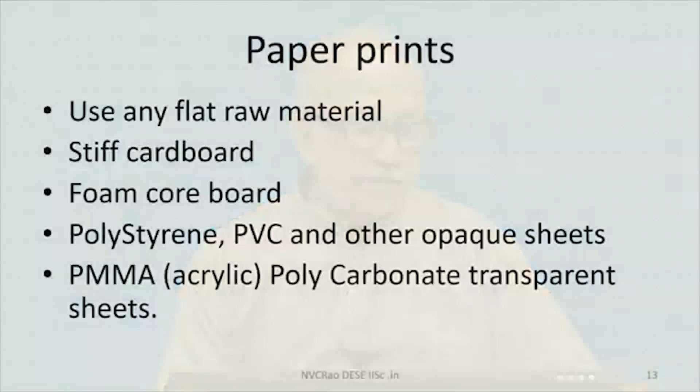Now, kindly look at my, what do you call this thing, saying it is very convenient for us to use any flat material because most of the things are made, and use the printouts as template. So, we have this template here. You can always stick it on the intended material, then you can carry out operations, then any work spot.

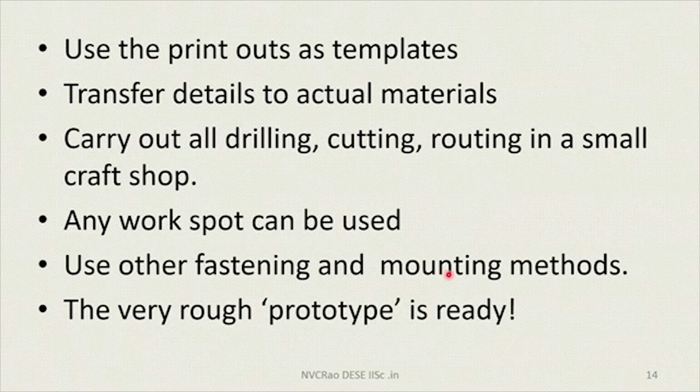Here it comes to mounting and fastening methods. Traditionally, in the case of molded parts, we have snap in place. Snap in place works well, but even there the first time simulating the snap fastener is a little tough. So, otherwise probably use a screw or something, or even putting a tape is no problem. Holding two parts together, just about anything goes and your prototype is ready.

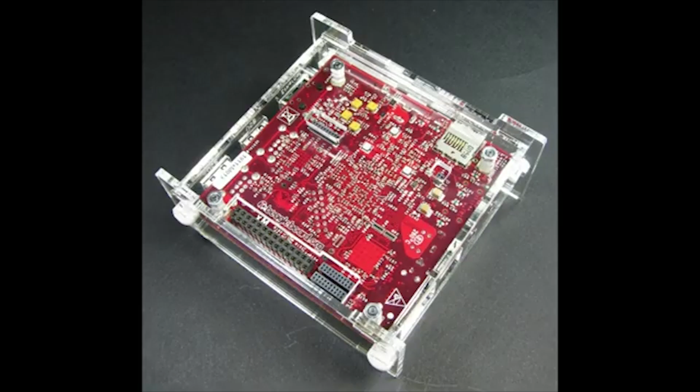Now, let me start with a few samples. This of course is taken from the available resources, and I acknowledge whoever has first made it and got this going. This one is a layout sheet prepared meant for probably laser trimming or laser cutting and assembling the whole thing together to make a beautiful system like this.

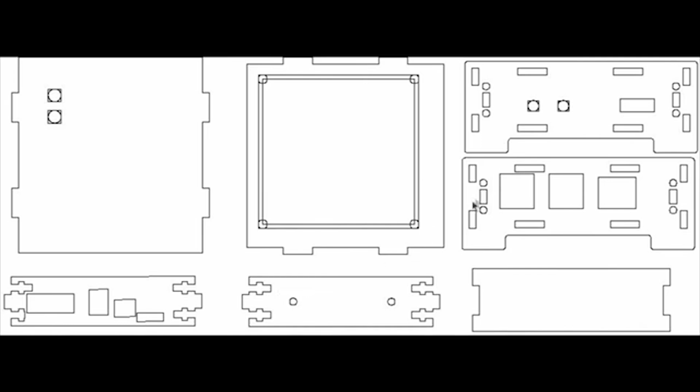Have you noticed this? This uses exactly all the parts that are described there, and in the corner have you noticed this? There is a special key like thing which is assembled here. This key probably sits here. You see here there are some places each will snap in place. Then you have seen these two things. These probably go and sit somewhere.

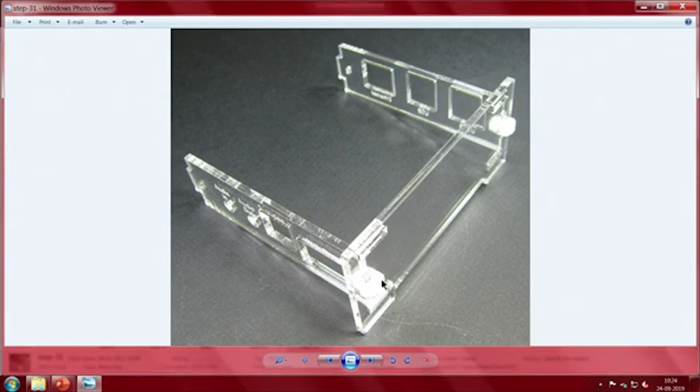So, you see here even production parts are made with flat sheets, and every time you need not go and depend upon a full fledged printed part. See the sequence. I have one part, and then after that, I will call it one face and two opposing faces, and then I just pointed out to you about the key or some fastener which is put here, and on the other side there is a bottom which is stuck on these things.

Why I am showing you this is probably this whole thing could have been made in a cardboard at home, because cutting a cardboard is easy. Now, you see here the moment you assemble everything, we already have a nice neat box, and then here this key has been shown. Maybe you can relate that you push it inside and everything sits here. Part of them are open, part of them are joined together. See how cute the whole thing looks.

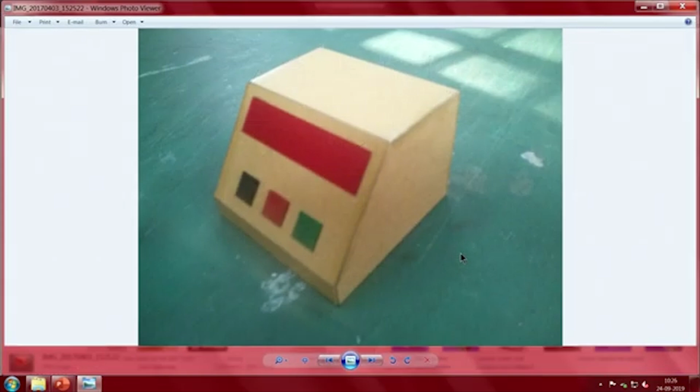Now, let me take the case of the reality of fabrication. If you imagine one small, I will take this. See here, this is just made as a student exercise. The idea being a cuboid structure, and there are the basic 6 faces. Right now ignore, of course there is a 7th face, ignore that. For you to understand typically the size, how you will hold it in the hand and so on, you have seen this.

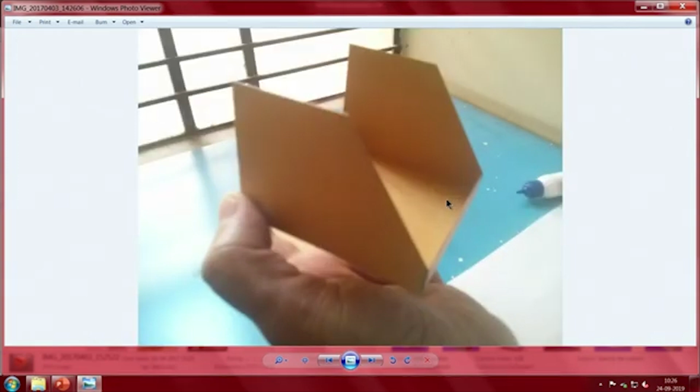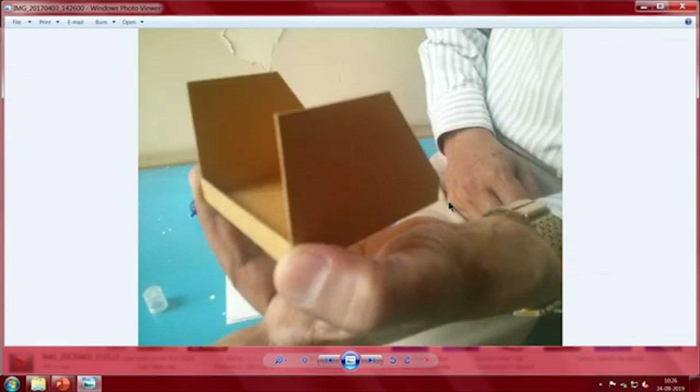That is my hand, and the whole thing is assembled by making things out of a simple cardboard. In this case it is a hobby cardboard, and two important details you will notice. In the front there is a small tab, and at the back one more tab is there. The function of the tab is that it will hold the structure together, and it can also be used as a fastening technique, putting one on top of the other.

This being a flat object, it is exactly how something made out of polystyrene, acrylic, PVC, or polycarbonate can probably be made as well. Now you see both of the parts are put together. Have you noticed some very interesting thing about it? First of all, just for simplicity's sake, thickness has been ignored. But in the case of sheet metal, we will need to consider the thickness.

And you see a gentle inward curve is given that will ensure that things fit. Now you see this is a developed sheet based on a development drawing that has been probably pasted on an A4 size sheet, and they have just trimmed it according to that.

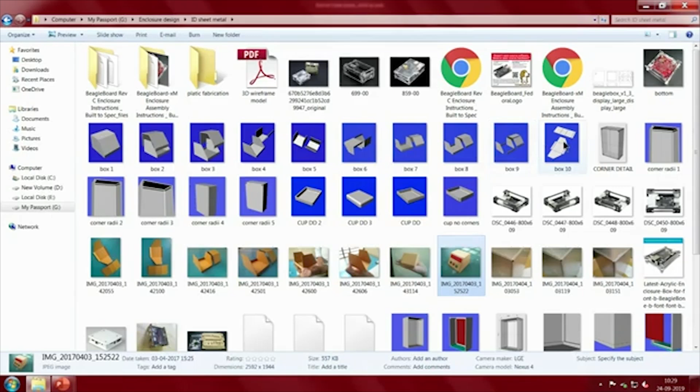Now, this is a slightly modified version of the other thing. If you are to use any other material other than the cardboard and which cannot be easily bent, a much easier way would be to probably make it into separate pieces. So here it is probably made out of an acrylic material, or in our case generally what we do, the top cover, this portion of it, will generally be made of acrylic so that somebody can see inside, and this whole thing will be made probably out of acrylic but opaque, so that it looks a little like a product, but then you can place this on top of it.

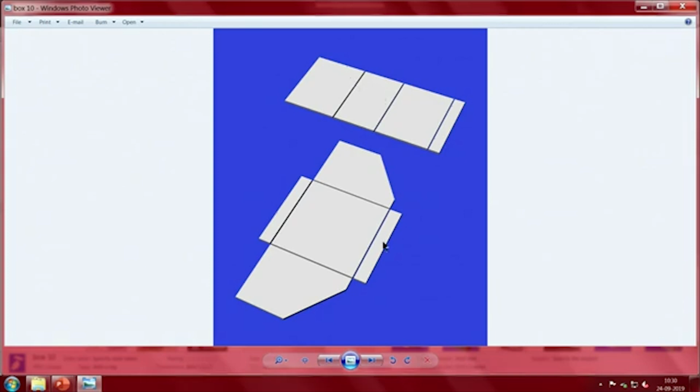Now we come to the interesting thing, what about the front panel which you are talking about. You see here all these pieces are small pieces. Now the first thing you will discover as part of your prototyping is that thicknesses are involved. Can you see here? There is a thickness, and now we need to take a decision: the height of this, does it go inside this and this portion covers it fully, or alternatively this is one portion and you have it as side two end caps. Depending on your design and various things you would like to have, you need to make a decision to subtract the necessary thicknesses.

Now we come into this corner, you have seen this here, this is cut normal, this is also cut normal to the surface. Does it match? Of course it does not, but you see here, the way this is shown, if I assume that this is a 45-degree angle, we have 90 plus 45, 135 degrees here, it does not match easily. So, at this point, a good craftsman, or you just need to match things and put up with it as things are.

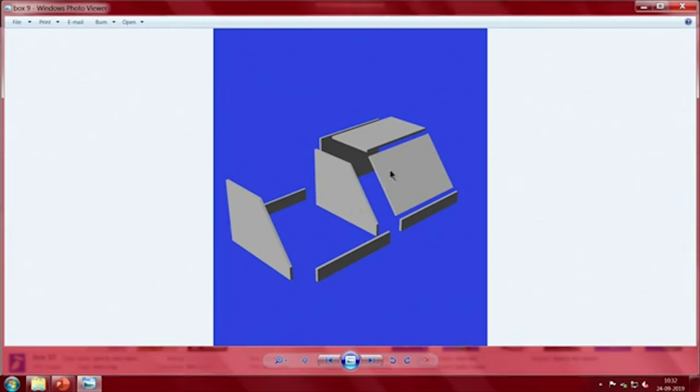Now, we come with a very clever alternative. Why need to match it at all? Why can't you let the top portion overhang a little? Let it overhang. Similarly, let this overhang a little, let this be recessed inside, and the moment you make this overhang by say 2 millimeters, you can have the side panels also jut out by about 2 millimeters. So, you have a bezel-like structure, three times a bezel-like structure, and you can probably hide all the imperfections. And part of the advantage is from the inside probably these two can be joined together using simple super glue or hot melt.

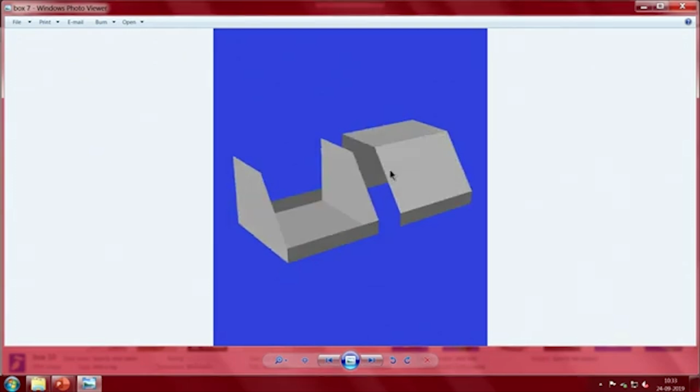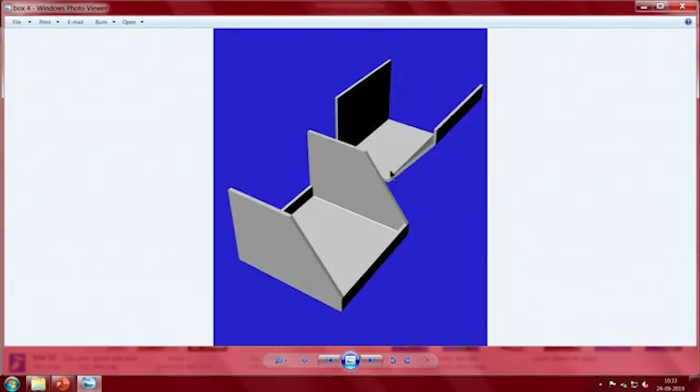See this, of course it looks miraculous, they have all been attached together, and now what was a thicknessless thing, suddenly there is a thickness. You need to just put these things together, and the other side of the view, see this, looks all hunky-dory, there is no issue at all, except the little hunky-doryness probably needs to be cured. You see this corner, this corner seems to be a problem.

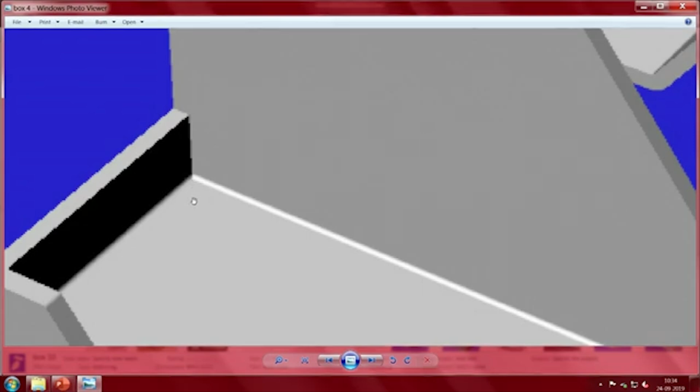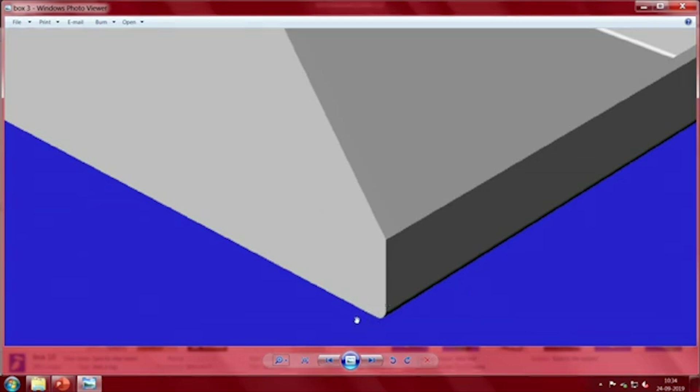In the original development, we have just assumed these things fit nicely, and then in this corner you will see a very, very interesting problem. This being a sheet metal exercise, you will see that there is always a radius here. Can you see? You have a radius. Now, how do you let the radius match with each other? We have chosen to ignore it, but actually there will be a gap here, and when it bends here, you need to give a corner relief for the whole thing.

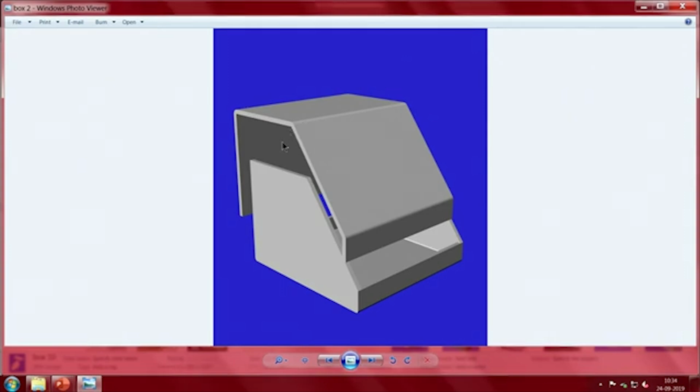So, we come to actual manufacturing practice, and this is what I was telling you here. You see this internal, and you see this internal, this appears sharp, but that has a radius. Something has to be done to address all those things. Eventually, when you put everything together, things should look neat. See here, neat, neat means neat.

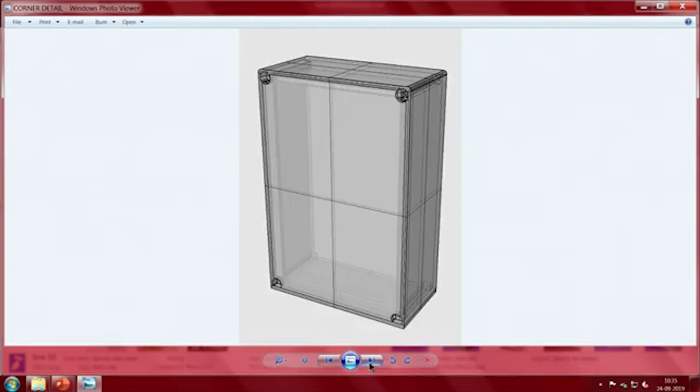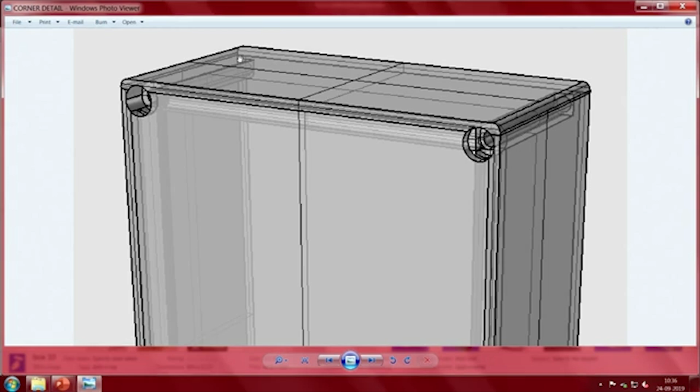Now, let me get on with a slightly different, a universal what you call enclosure. Often you find this in the catalogs. In the catalog, you will find these are IP, that is ingress protection 54, 55 class of standard electronic boxes. You will discover some very peculiar situation by which your particular requirement does not fit into an available standard unit, because you have not started with that. You have not started with the standard enclosure and arranged things so that they can suit you.

And unlike the BeagleBone and unlike the Raspberry Pi and unlike the various other things I have shown you, Arduino, this is not a standard for which this IP enclosure has been made. IP enclosures have been made in a fairly interchangeable, universal, big system.

So, if you are smart and you know that you are replacing another equivalent existing unit, you can use one of those standard modules and try to fit your electronics, especially non-PWB hardware. I have mentioned this right in the beginning itself.

We have connectors, we have control elements, we often have displays, we have so many of these things which go into that. So, if you see inside one of these enclosures, it is actually not a molded enclosure. This has been just created in a solid modeling exercise.

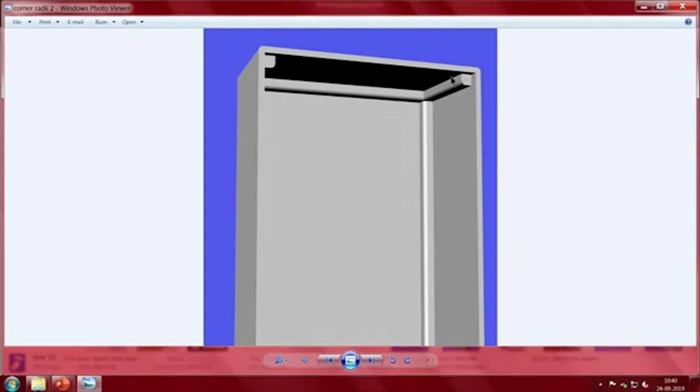If we have a look at it, actually it is nothing, just for my satisfaction, we have rounded it. 4 side faces of appropriate height have been taken, and these corner pieces have been attached to that. This has been filleted on the outside, otherwise there may be a fillet here. They have been filleted, everything has been joined together. It looks as good as a manufactured item.

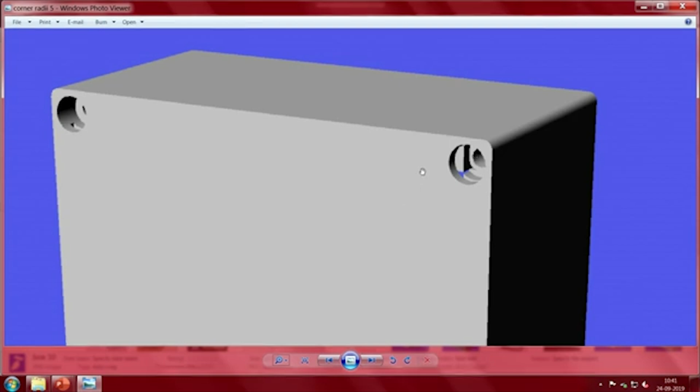Now, standard operations like drilling have been done, and on the top you have this. Now you have a box, or an enclosure which is ready as I want. Notice something here, this is probably the back, and then you notice something very, very interesting. Counter bore, and then on the other side something with a small adjustment. So, you can build in detail how you would like to deploy it. Do you need to have a clamp, attach it somewhere? All these details can easily be worked out.

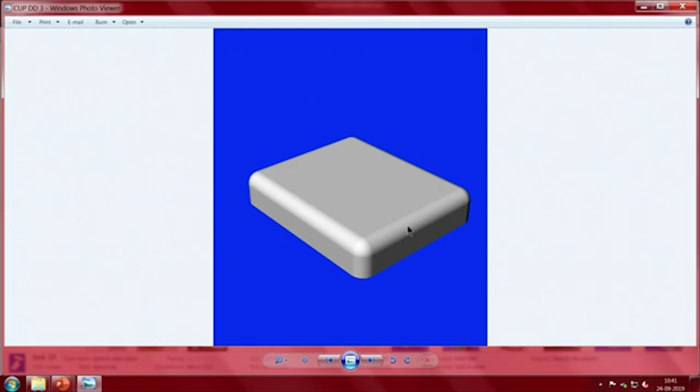Now, I will come back to a small thing which I am sure several of you have seen. This is actually one of the small items which comes with our earphones. A thing like this eventually will be made in plastic, but if you make it in sheet metal, you will end up with a very unpleasant thickness all around it. Because of the small size, this thickness looks very daunting.

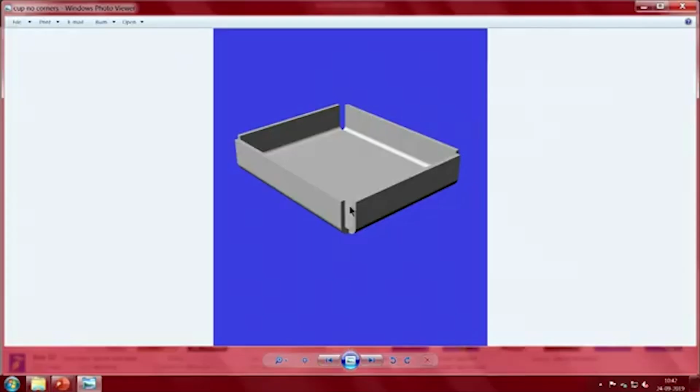Now, we come to the equivalent sheet metal of it. Imagine that particular thing needs to be strong. If you throw it, it should not break. It should not be made out of a brittle plastic which is likely to shatter in the corners. So, we end up with the sheet metal version. You have seen the sheet metal version. This is what I was trying to tell you.

At this corner, we end up with very peculiar detailing. There is no way around it. Otherwise probably you go in a little on that side and then bend it up like this. So, overall the dimensions can be maintained. Interesting, isn't it? This is where making a simple prototype helps.

Even our people who work on sheet metal often make that sample. They take any available material. For me as an engineer, probably cardboard is better, but in their case there will usually be some surplus or scrap material. They make a print, stick it on that surplus material which is likely to behave a little like the original material, then carry out all the operations and do the correction in the main drawing. For example, I take it that there is a box of some given dimensions.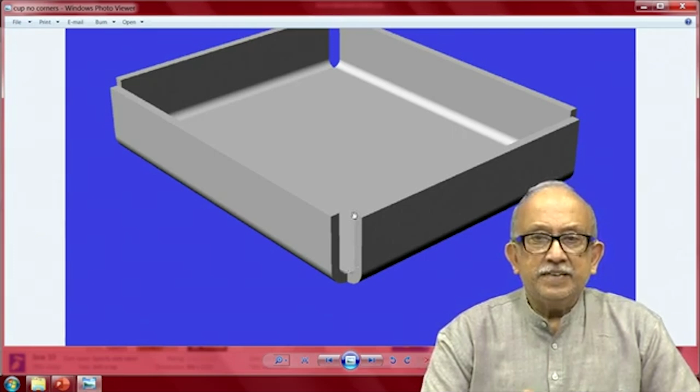I take it from one side to the other, this may be around 30 millimeters, the other side may be 50 millimeters. So, 30 by 50, while it looks very fine here, you need to compensate on taking this thing inside. We take a small thing inside here, and once you take it and make a bend here, this thing is likely to jut out. All these dimensions can easily be worked out in any CAD program.

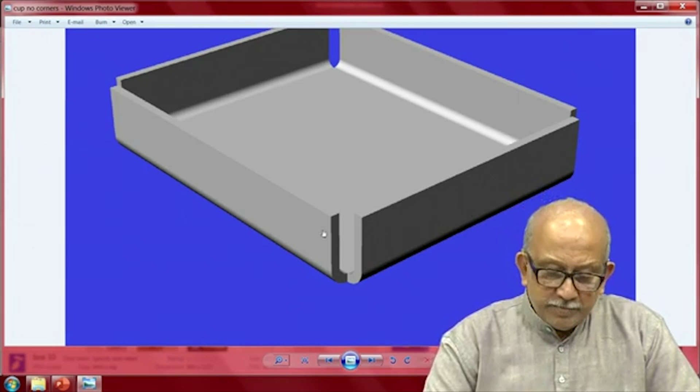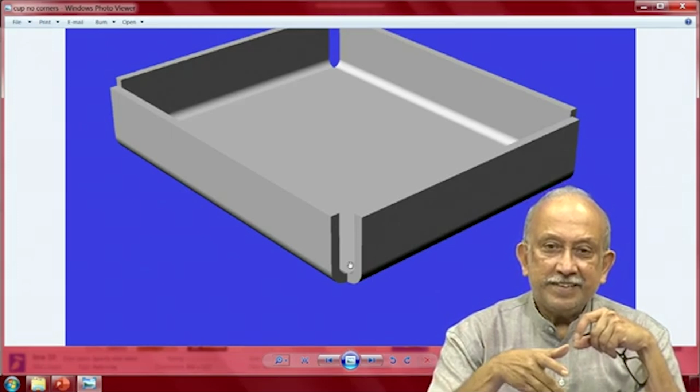Typically, most students I come across are familiar with either Solid Edge or SolidWorks, and most of those by Dassault or by Siemens, or any of the Autodesk products, also have a sheet metal variant, a sheet metal add-on. Those add-ons take care of all these details, but the main problem is data regarding the compensation, what is called the bending allowance, and behavior of the material, such as the minimum internal radius, and the type of fabrication machines you use. Everything is a variable which has to be taken from the physical shop.

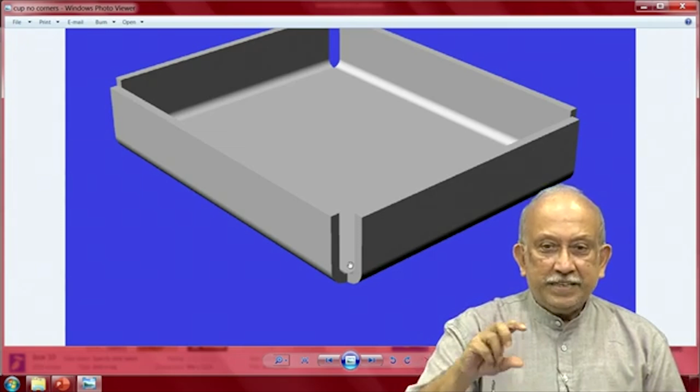This is not a problem actually, this is a real issue with all simulation work. There is a physical phenomenon. Based on the physical phenomenon you simulate, and then you find that one particular ratio probably needs to be altered a little, and hence you can improve the material, either search for the material or make a compensation. The same way in our case, one still needs to make a sample piece of the final thing, especially sheet metal, and note down all the details.

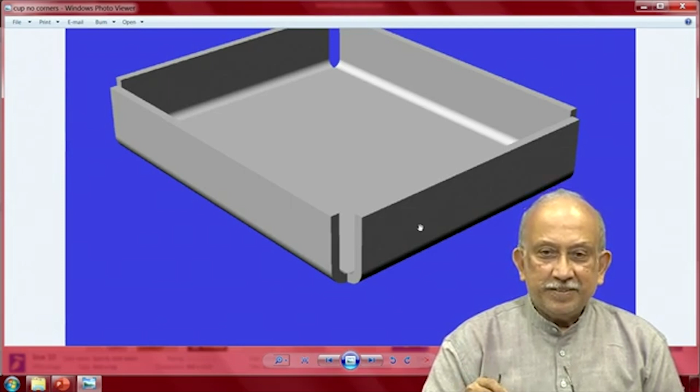In absence of this, for most standard materials, data is available. It may be off by maybe 0.09 millimeters. In general, it is very accurate and it does not really matter. Once again allow me to stress that the starting point is a good CAD drawing and a concept in the mind.

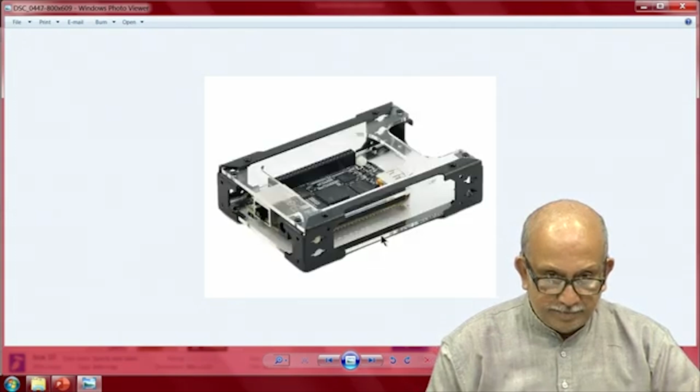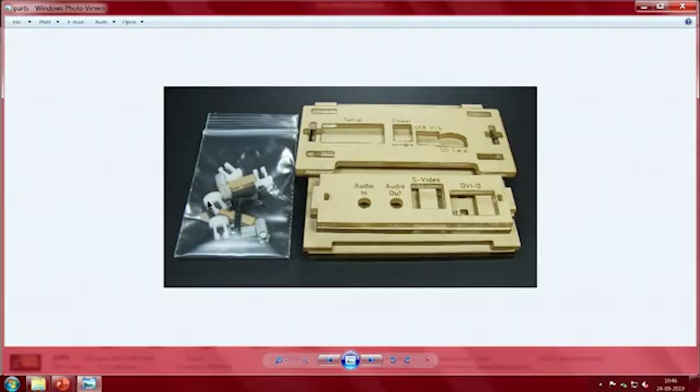Now, let me see what the next one is going to show. I do not know which part of it is metallic, which part of it is this thing. I think I have covered this. I will now go back and pick something slightly better. This is the laser trimmed or laser cut material which is available on sale.

Have you noticed, for example, your particular project may not need these two things, may not have audio at all, and you may have an SD card but not an OTG, on-the-go, cable. In this case a non-USB 5 volt power supply is shown, but you may be using USB, and the serial port is probably only needed at the time of programming. You need to have a tab which can cover it. So now you will notice that once you get all these items, this is a kit. Now, what about this?

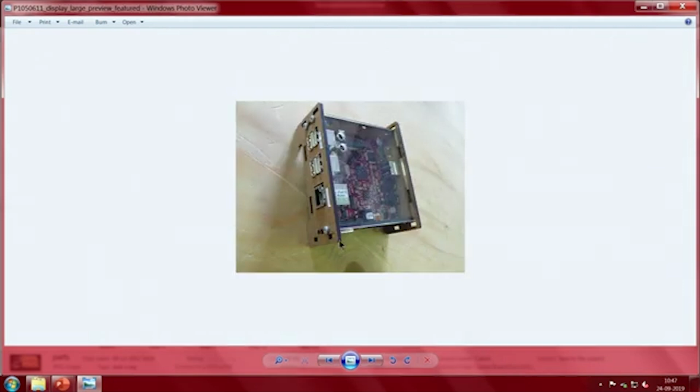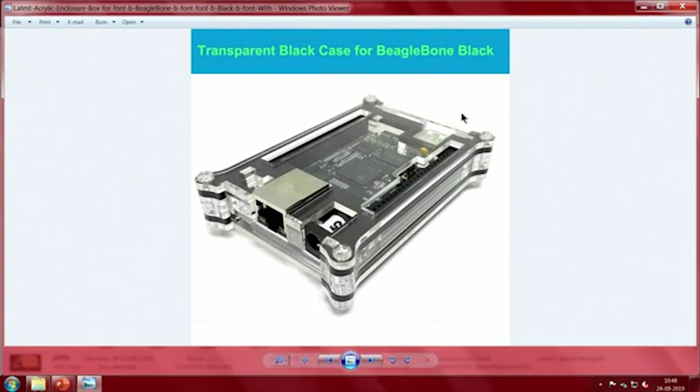So, this is probably made by one of our students. While this is actually made with laser cutting, I am sure the whole thing could have easily been made by you in any other material. This of course is a professionally made item. So, you have various things sitting here, and you can see these things can be built easily.

If you remember, the earlier slide showed you the corner that needs to be taken care of. The first time you go to the fabrication shop, you will notice that these details, while critical, are probably killing the product. You wanted a product that looks neat. All the renderings I have made look too neat, but this is the reality. So, how do you get over this? One reality is a radius, another reality is gaps that do not close.

It looks crazy. This is a drawing made by one of the very common 3D programs. It is not by definition a full-fledged prototype making app or software. It just shows the dimensions I want: this is probably 80 by 120, and this would have been maybe 25 or 30 millimeters.

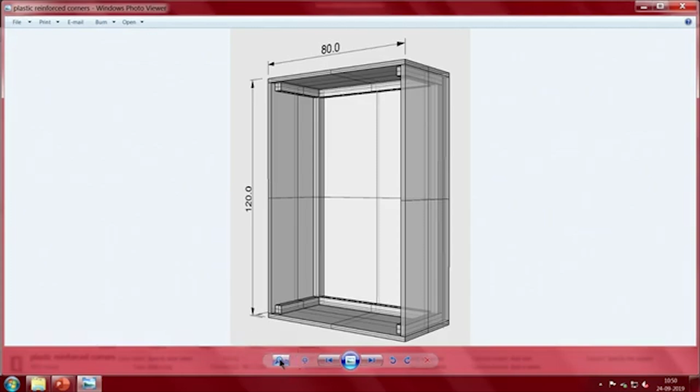Now, why this has been made: see this corner. What shows 80 is correct because it is visible, but this side plate need not be 120, it will be 120 minus 2 of the thicknesses.

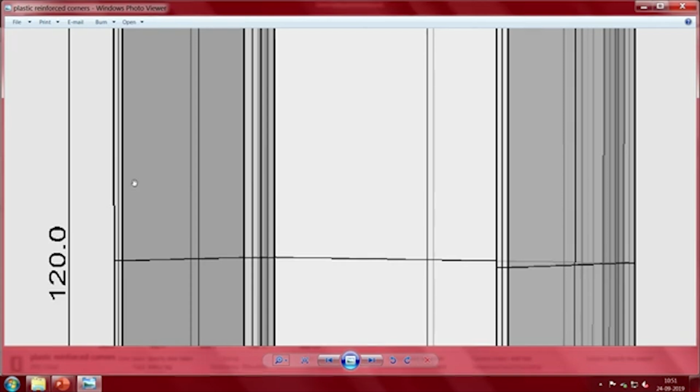Looks insignificant or trivial, but this is the one that makes or breaks your product. Once you take the initiative in making these things properly, you will have nice, neatly made corners. And you see here something else next.

In case you are using acrylic sheets and all that, you can probably use grey plastic, and I do not know why I have chosen green, just to show that I can choose green, and the top cover is a LED red filter. You can make the whole thing in one, and then add a small filter; the full thing can be made this way, and the remaining thing can be masked. So it looks like a real life product.

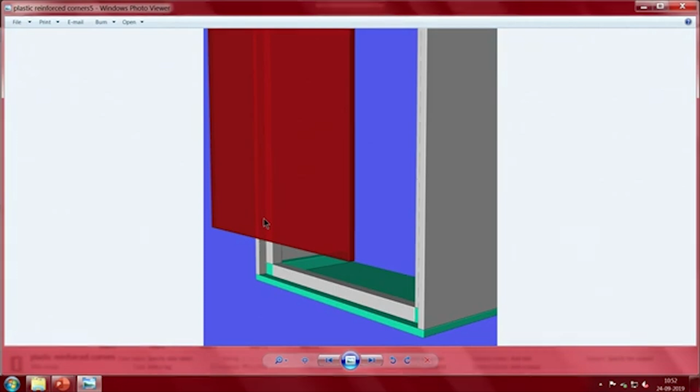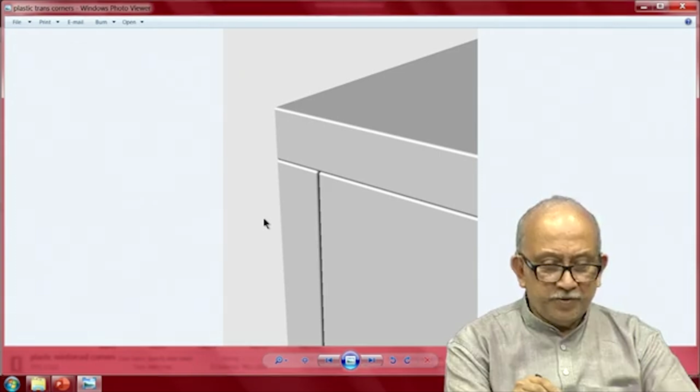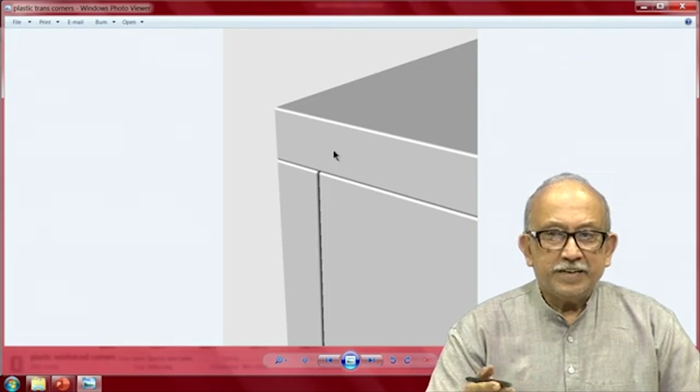So you have the advantage of happily using the smallest things available and trying to come up with things which perform identical to the main material. And if you are lucky enough to have at least 2.5 and 3 mm sheets, you can directly work in plastic sheets. Alternately, for the first 2 rounds, you can work with cardboard, as I said, foam core. So many of these things are available.

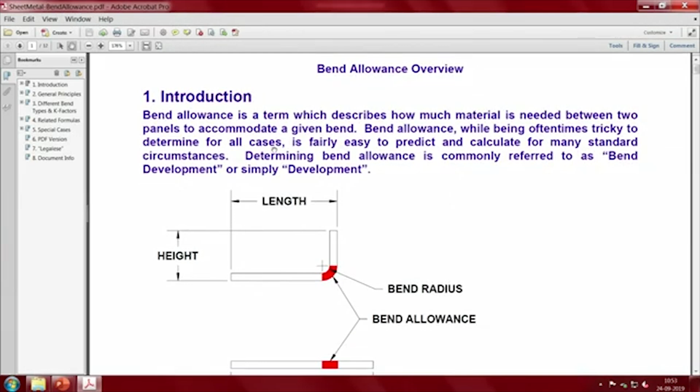So, I will stop here because it's still quite a lot of things that have been covered. I will just show you, though, which is not directly related at this point. This is exactly what I was trying to show you. Now you will be asking, sir, you started with something to do with making things simply. Why are these required like that? I just wanted to show you that in real life these things are involved. I will not go into detail at this stage, because I wanted to stick to something which you can make at home.

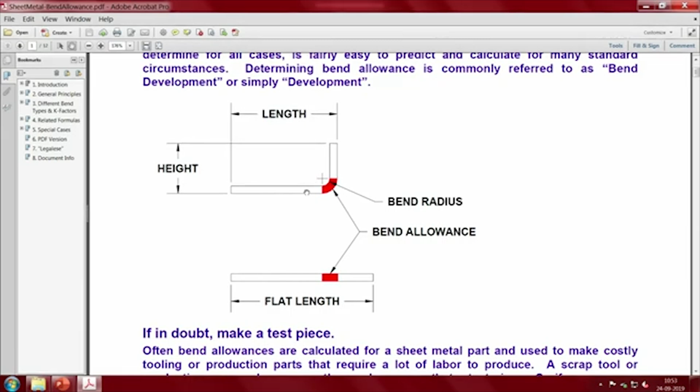Which brings us to another important aspect of things. Even thick cardboard, anything more than 0.5 mm, involves a radius and involves a bending. Now how do you take care of this bend? As I told you, usually you have an inside radius, then you have an outside radius. And how do you make these things take a bend neatly? Just try it, take a piece of cardboard, try to bend it a little here and there and see how well it goes. So thank you, I will stop here.

Meanwhile, I want you to think about a universal remote which you use in your workplace, or in case you are a student and you have your own room. What are the various things your remote needs to have? It should not be very complicated like the ones that I have shown you, with so many knobs, so many things which are not really relevant to us, and if anything they are only distracting. And if you have an app, yes, you can work with an app, but these days remember a lot of apps require Wi-Fi, or they insist on Bluetooth connectivity. A lot of devices may not have Bluetooth connectivity.

And what do you do with the old audio set, or in case you have a sound bar, and a television with a set-top box? Here we get into that very peculiar thing. If you have a set-top box and a TV, you will probably only be controlling the set-top box and not the main display, because if you play with any of those elements on the remote, you will lose the picture, because it will go off into a separate input mode, separate output mode. And some of the remotes have teletext and oracle, which I do not know if it really works, or it's something they tried and it never took off. The remotes are still made in large numbers, and there is nothing we can do about it.